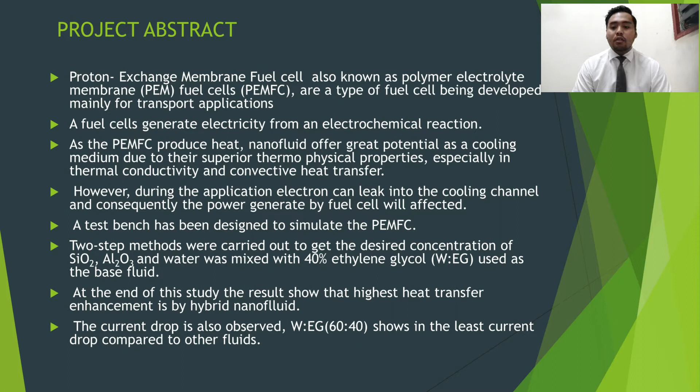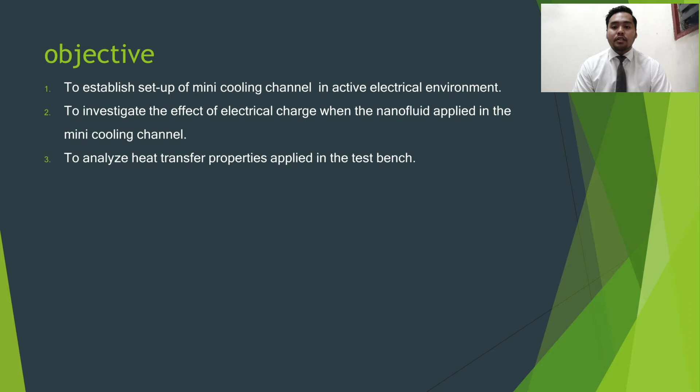For the objectives of this project: firstly, to establish the setup of a mini cooling channel in an active electrical environment. Secondly, to investigate the effect of electrical charge when the nanofluid is applied in the mini cooling channel. Thirdly, to analyze heat transfer properties applied in the test bench.

For the scope of work: conduct the experiment by using a single cooling channel only, use hybrid alumina and silica based nanofluid as the coolant fluid, constant heat flux of 276 watts per meter square, and use ethylene glycol water mixture as the base fluid.

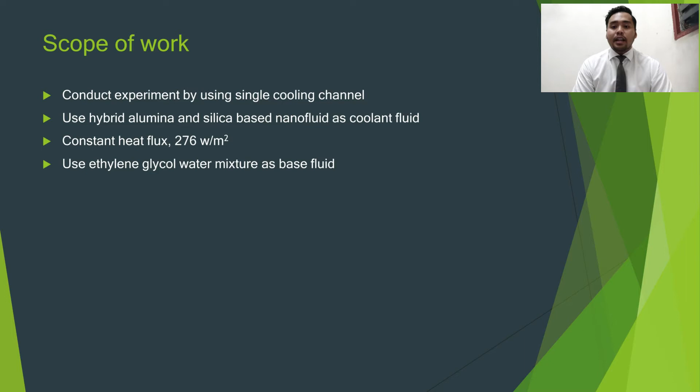As an introduction, PEMFC functionally converts the chemical energy of a fuel and oxidizing agent into electricity. It's a clean technology where the byproducts are heat and water, with low operating temperature, low noise, quick start-up capability, light mass, and high power density.

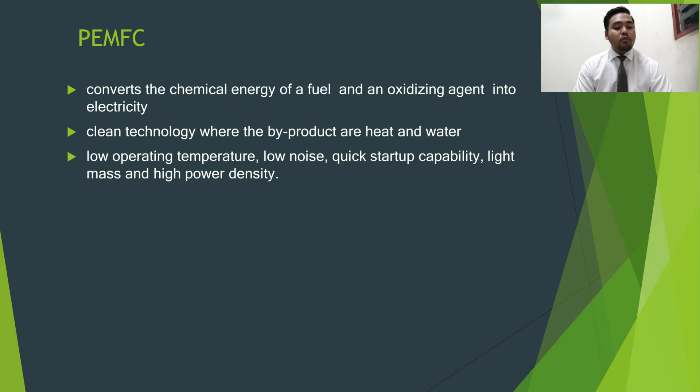Nanofluid is a fluid that contains nanometer-sized particles, known as nanoparticles, potentially used in heat transfer applications to enhance thermal conductivity compared to conventional fluid like water. Alumina and silica will be used as the nanoparticles for this project.

This is a sample of 0.5 concentration alumina in water EG, and a sample of 0.5 concentration silica in water EG.

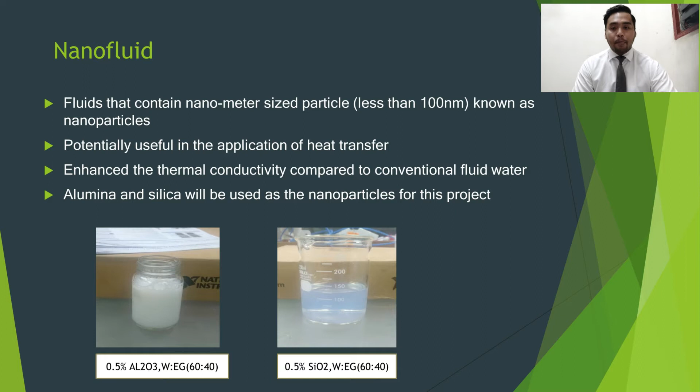The methodology and data analysis.

Firstly, to establish the setup of the mini cooling channel in an active electrical environment, this is the test bench system setup: flow meter, digital meter flow, pump, tank, DC power supply, data logger, and thermostat. These are very important equipment for this project.

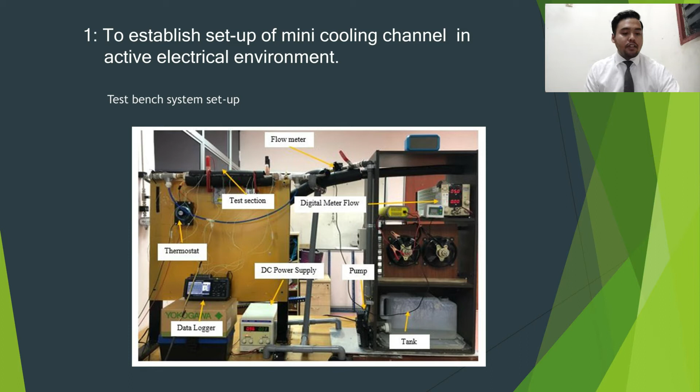This is a schematic diagram. The nanofluid is filled in the tank. The pump sucks in the fluid, and the fluid flows through the channel. The heater pad produces heat and heats the channel to the required temperature. The fluid will flow up and enter the radiator, then return to the tank.

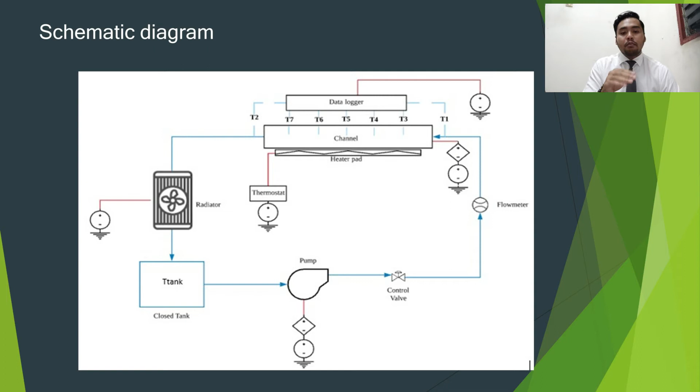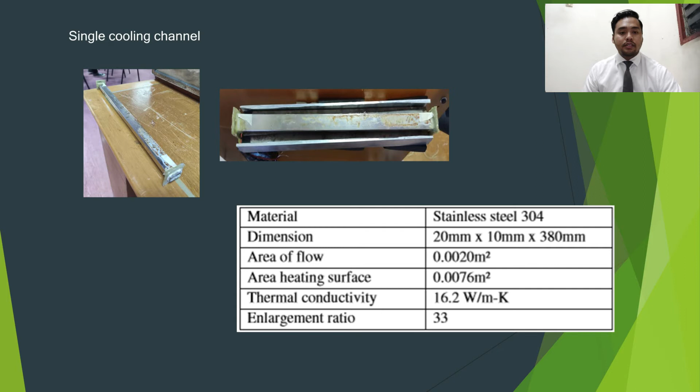This is the heating pad. The heating surface is 0.0076 meter square.

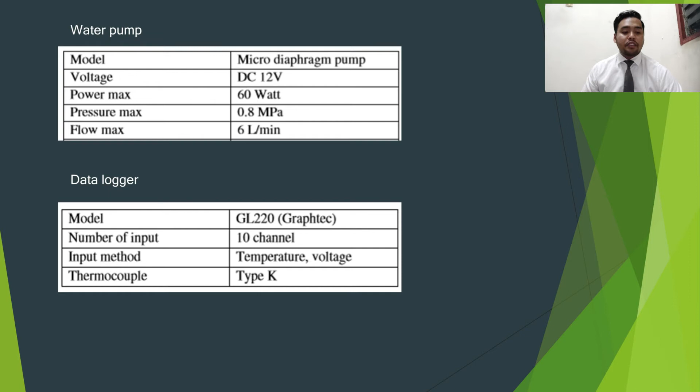For the test bench improvement, the head cap works as the connector between the fitting and the single cooling channel. The main problem faced at the test bench was that the temperature reading at the test section may not be accurate due to the thermocouple being pinched between the head cap and single cooling channel.

There was also a leakage problem at the test section when the flow rate of water was 0.25 liter per minute. The leakage of water started to appear at the connection between the head cap and single cooling channel.

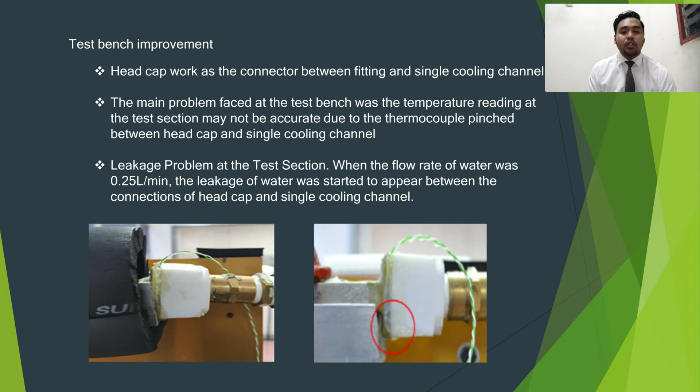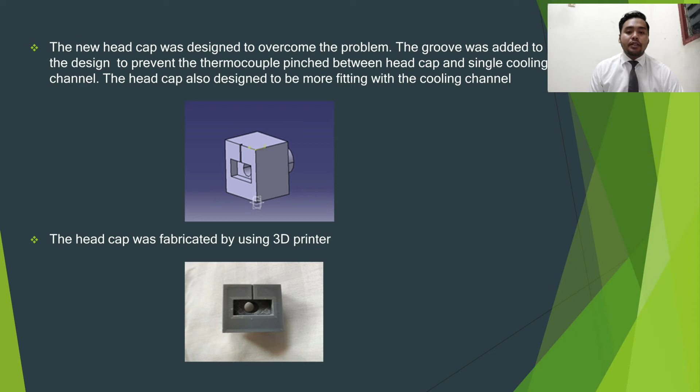To overcome this, a new head cap was designed. A groove was added to the design to prevent the thermocouple from being pinched between the head cap and single cooling channel. The head cap was also designed to fit more closely with the cooling channel, and was fabricated using a 3D printer. Hose and cooling channel were insulated using EPDM foam to prevent heat loss to the vicinity.

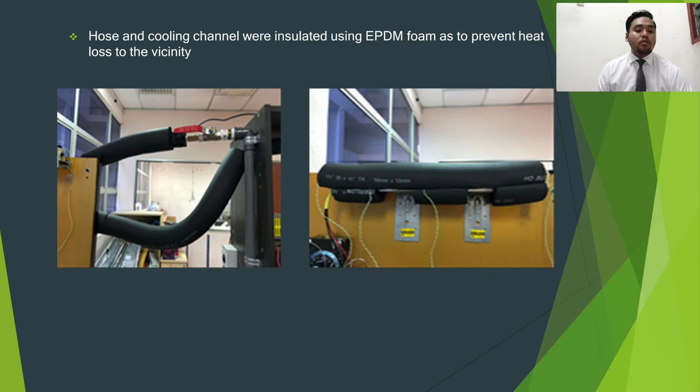Secondly, the nanofluid preparation. A two-step method was carried out to get the desired concentration of silica and alumina, with ethylene glycol used as the base fluid. Firstly, by measuring the desired amount of silica, alumina, and ethylene glycol, the mixture of nanoparticle and base fluid was stirred thoroughly.

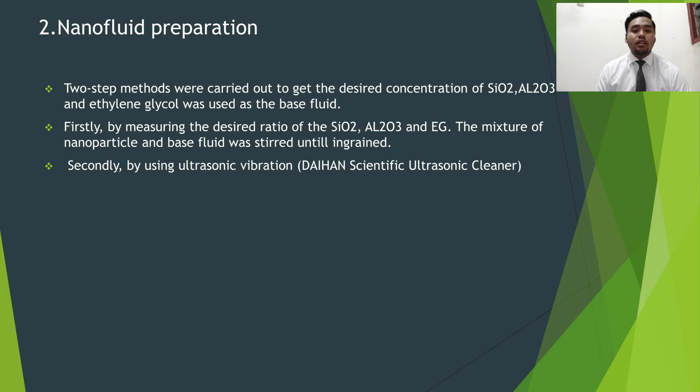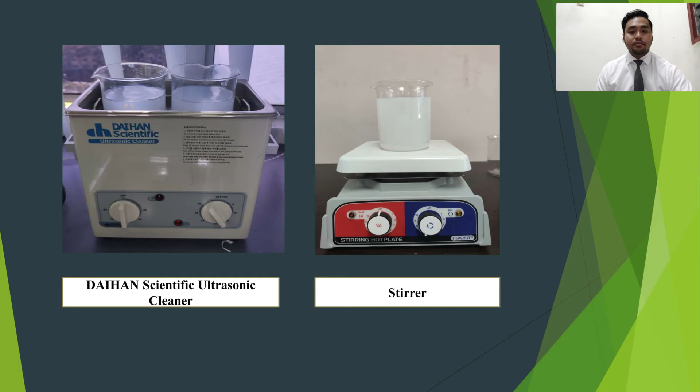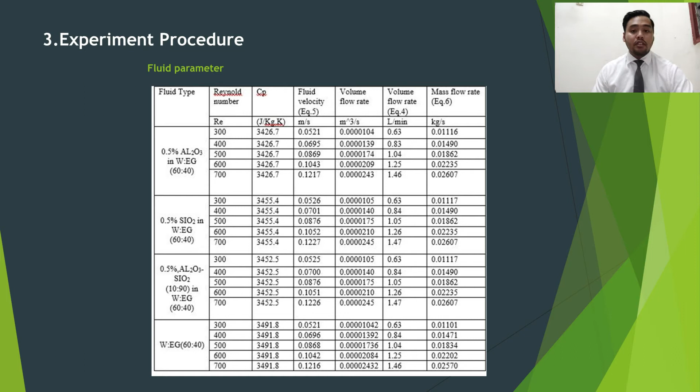This is the procedure of the experiment. Firstly, the tank is filled with approximately 2 liters of cooling fluid. Secondly, the electrical conductivity of the fluid is measured properly using a TDS EC meter. The heater is switched on and the thermostat is set to the desired temperature. The temperature is monitored appropriately until all temperatures reach the set temperature.

The pump is switched on after, and the power of the pump is controlled based on the required flow rate for each Reynolds number. The radiator fan switch is turned on to start the radiator operation. The DC power supply connected to the cooling channel for the electrical charge leak test is set to 0.7 voltage and nominal equivalent 3 ampere.

Sufficient time is allowed for the experiment to take place until the temperature reading at the data logger shows steady state condition. The temperature readings from the data logger for all sensors at steady state, and the electrical current, are recorded for 6 minutes at 30-second intervals accurately. Lastly, the electrical conductivity of the fluid inside the tank is then taken.

This is the formula and equation, specifically the formula and equation for heat transfer analysis.

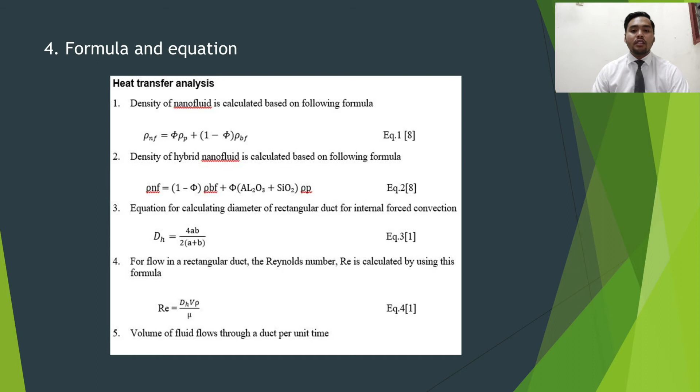For the project finding, I have produced a graph comparing heat flux in different types of cooling fluid. This graph shows the heat flux behavior at the increment of Reynolds number for different heating loads.

The value of the heat transfer rate and heat flux increase when the value of Reynolds number increases from 300 to 700. The heat transfer rate between Reynolds number 300 to 700 is based on heating of the heater pad at 60 Celsius and 70 Celsius.

As compared to water EG, the nanofluid graph shows better heat flux of 45% to 59% at 60 Celsius and 34% to 68% at 70 Celsius.

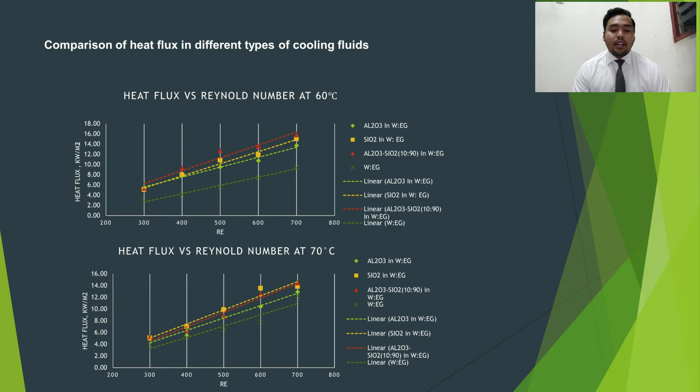At 60 Celsius heater pad temperature, the hybrid nanofluid has better heat flux than other single nanofluid, 4% to 11% better. At 70 Celsius heater pad temperature, the heat flux of silica in water EG is slightly 8% higher than hybrid nanofluid.

Next is a comparison of convection heat transfer coefficient in different types of cooling fluid. This shows the convective heat transfer coefficient behavior at increment of Reynolds number for different heater load. The heat transfer coefficient is proportionally linear between the heat flux and the thermodynamic driving force to the flow of heat.

The value of the convective heat transfer coefficient increases when the value of Reynolds number increases from 300 to 700. The heat transfer coefficient between Reynolds number 300 to 700 is based on heating of the heater pad at 60 and 70 Celsius.

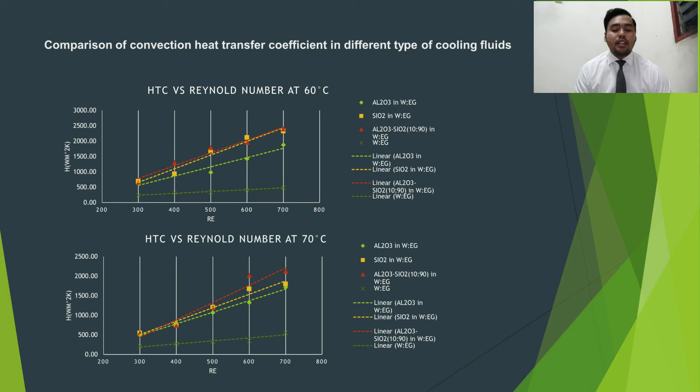The hybrid nanofluid graph shows better heat transfer coefficient compared to the other fluids. It is 280% to 380% better than the result of water EG at 60 Celsius and 200% to 280% at 70 Celsius. Conversely, as compared to silica in water EG and alumina in water EG, hybrid nanofluid has better heat transfer coefficient of 3% to 27% at 60 Celsius and 18% to 24% at 70 Celsius.

This is a comparison of Nusselt number in different types of cooling fluid. This graph shows the Nusselt number behavior at increasing Reynolds number for different heating load. The Nusselt number is defined as the ratio of convection heat transfer to fluid conduction heat transfer under the same condition.

The graph shows the increment of Nusselt number when the value of Reynolds number increases. The Nusselt number increases in a linear profile. The hybrid nanofluid shows higher change of Nusselt number than other types of fluid.

It is 280% to 380% higher than the result of water EG at 60 Celsius and 200% to 280% at 70 Celsius. Conversely, as compared to silica in water EG and alumina in water EG, hybrid nanofluid has higher Nusselt number of 3% to 27% at 60 Celsius and 18% to 24% at 70 Celsius.

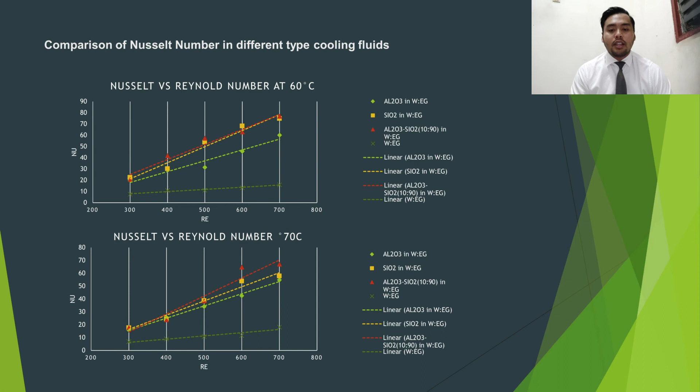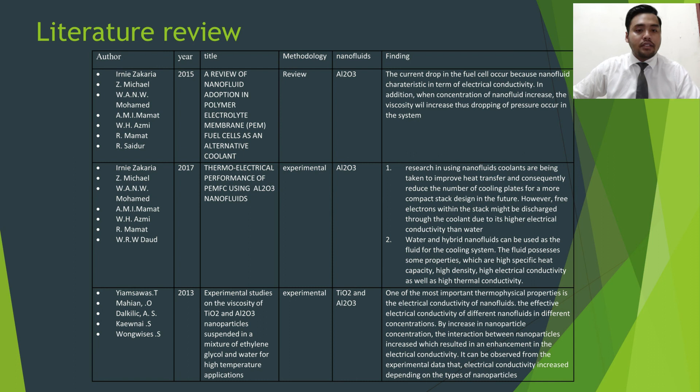This is my project planning. As you can see, my planning went out of schedule because of COVID-19. However, I could still manage the time and improvise my plan until I finished my project.

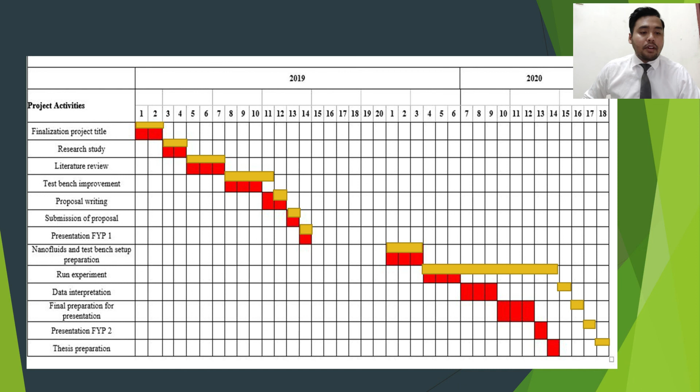As a conclusion, the objective of the project has been achieved successfully, which is to analyze nanofluid coolant for PEMFC of single cooling channel.

The heat flux from the channel surface to the fluid increases when the Reynolds number increases due to the effect of heat capacity. The hybrid nanofluid has a better convective heat transfer coefficient compared to the water EG and single nanofluid.

The electrical current that was applied to the channel decreased when the Reynolds number increased because of the effect of electrical conductivity in the fluid.

The electrical current will jump out more into the fluid when using silica in water EG as a coolant compared to water EG and alumina in water EG, because silica in water EG has higher electrical conductivity.

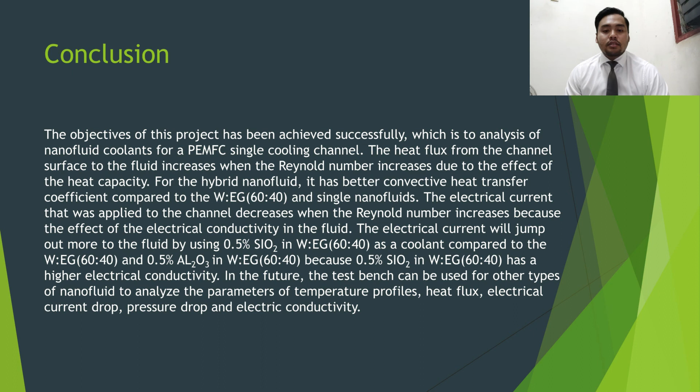In the future, the test bench can be used for other types of nanofluid to analyze parameters such as temperature profile, heat flux, electrical current drop, pressure drop, and electrical conductivity.